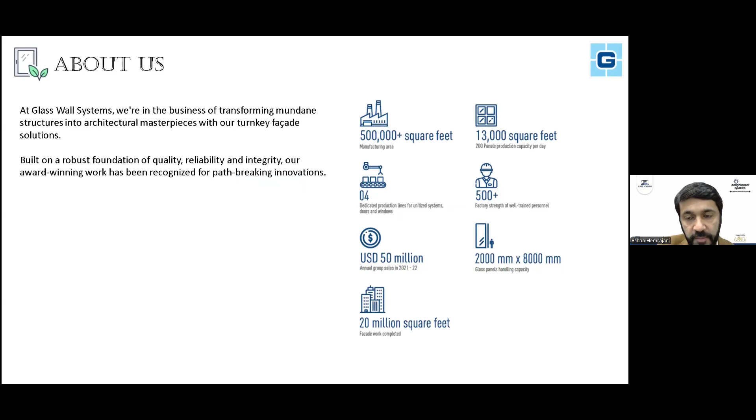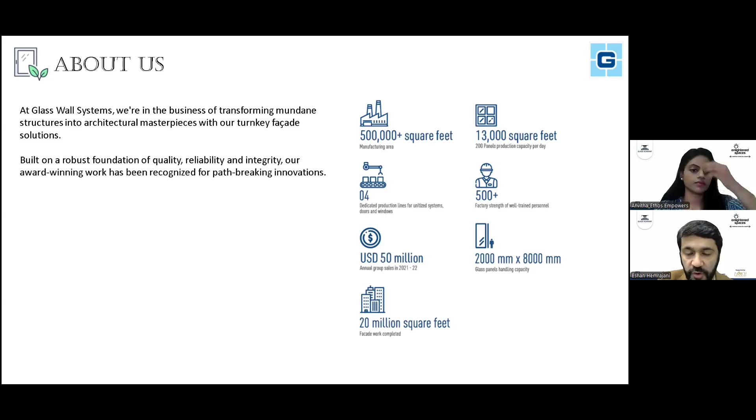So what I'm going to start with is a quick introduction about the company that I'm representing, Glass Wall Systems India Private Limited. We are basically facade fabricators based out of Mumbai, India. What we do in the country is we execute turnkey jobs related to facades on buildings, and we do everything in terms of design and build. So we have our own engineering team, we do our own manufacturing, and we do our own installation on site as well. We do an end-to-end service for our clients across India and now even in the US and Australia.

The flagship company where we are carrying out facade works is Glass Wall Systems, and I look at the operations in this company. We are present globally, but our head office is based in Mumbai, India.

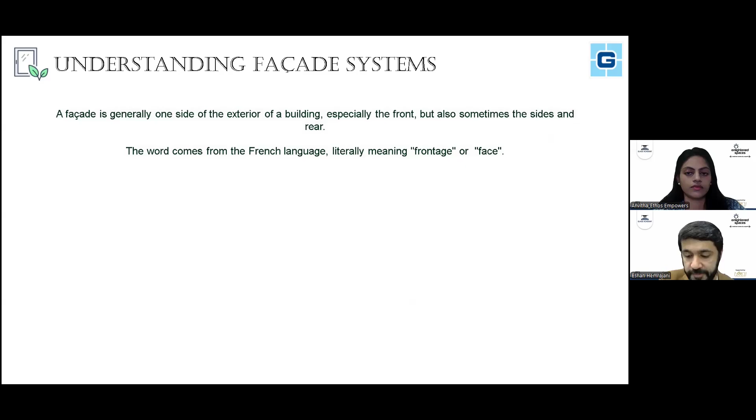Jumping right into it, facade is basically meant to be anything on the exterior of the building, and it is derived from the French language, meaning frontage or face. Facade as a concept has evolved tremendously over the past many years, and it is basically, in my understanding, a function, a balance between function and aesthetic, and people are striving to get the right balance between both. They sometimes work in tandem, they sometimes do not.

So what we aspire as engineers or builders, we cater to both sides of the subject, where we cater to the aesthetic determined by the architects and also the function determined or required by the clients or the consultants on the job. What you have as a result is very pretty looking buildings, and this is what we aim to do.

There are some key factors when you design a facade system on a building. The first and most important thing is that you have to choose the right materials and finishes, because being on the exterior of the building, it is under a lot of pressure in terms of air, water, seismic movements, and stuff like that. So the facade system and the materials that go into making it have to be able to withstand all the forces of nature. This is one of the most important things, finding a balance between the aesthetic and the function of the material you're choosing.

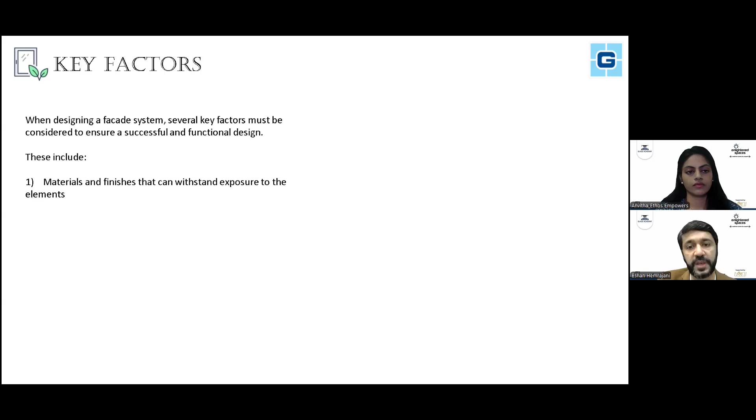Any sort of facade system on the exterior has to have strong principles in terms of drainage and water management, because the function of the facade is to not allow any natural element in terms of water to enter the building and cause problems like mold, leakage, or other issues. So any system has to have adequate drainage designed into it.

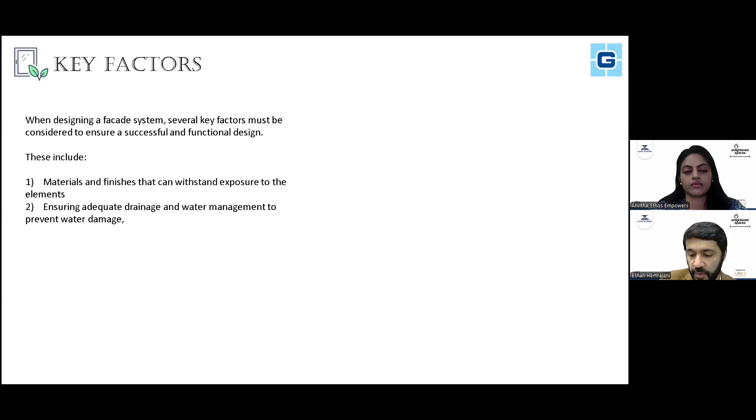It has to be properly insulated. Thermal performance is of high importance, because you want your facade to have maximum vision, typically on a glass building, but you want minimum heat loss from the building. So what you need to cater to in terms of the design and the elements you use is to obtain a high thermal performance on the building.

What we have right now, and which is gaining trend with the vision of the world and vision of India also, is to use sustainable and eco-friendly elements. We all have, I believe, a larger aim in our lives to take as little as we can from the environment, and we need to start exploring as an industry more sustainable and eco-friendly elements to use on the facade.

Wind loads and structural integrity obviously are of utmost importance. It's structural safety in terms of the facade and its integrity, because the building is expected to stand for a minimum of 25 to 30 years without maintenance, even longer. Sometimes you design structures for 100 years. So the math that goes into it is a function between having the right cost on the job as well as having the right integrity of the system in terms of structural performance. That is something that needs to be taken into consideration when designing any sort of facade.

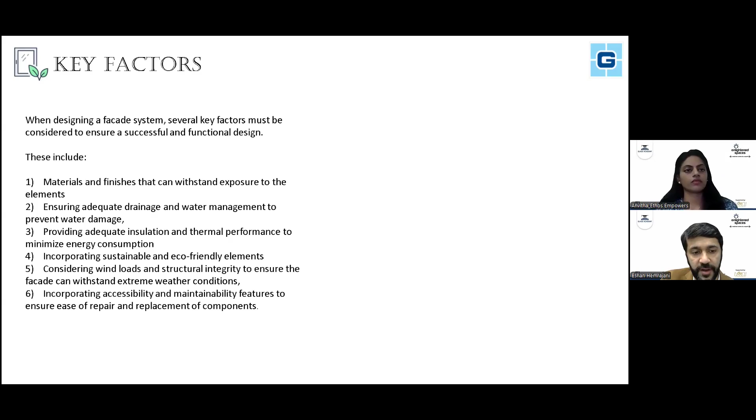Typically, facades are marketed to be maintenance-free or have minimum maintenance. However, you need to be sure as to how you're going to maintain the facade from the exterior of the building. So you need to incorporate accessibility and maintenance features while designing the facade itself.

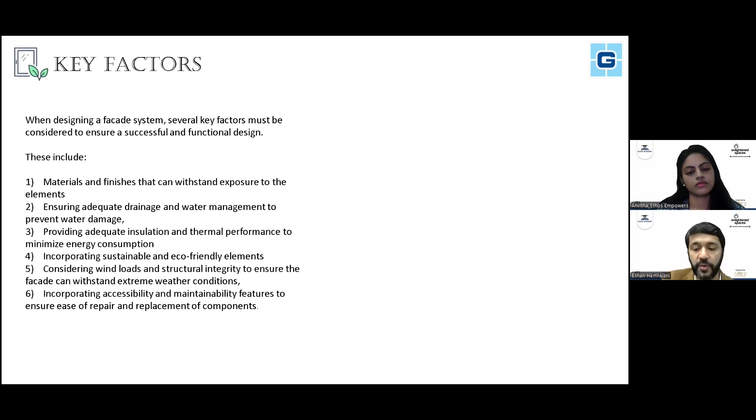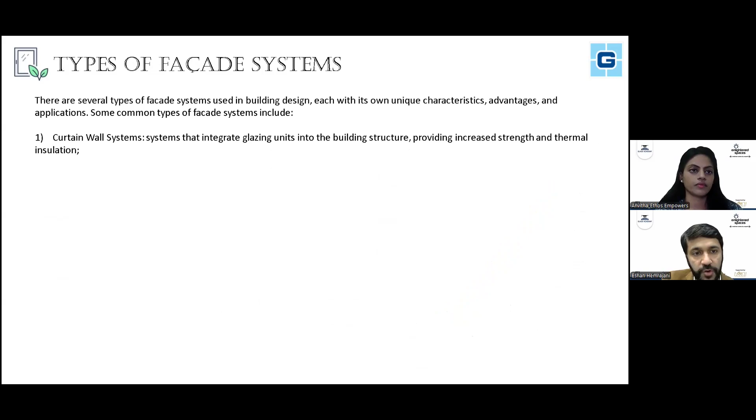There are several types of facade systems, and each of them have their own advantages, disadvantages, strengths, and weaknesses. Typically, what I want to talk about today is curtain wall systems, which are basically aluminum and glass, and different systems within curtain wall systems using glass as an infill.

We have rain screen facades as another type of facade system. It's nothing but a rain screen, as the name suggests. You have an exterior cladding which is attached to the building structure, but it allows for ventilation and drainage as a pressure equalized system, acting more as an aesthetic element. Whereas curtain wall systems have to be not only an aesthetic element in terms of cladding material, but also have a huge amount of performance spec that they have to adhere to.

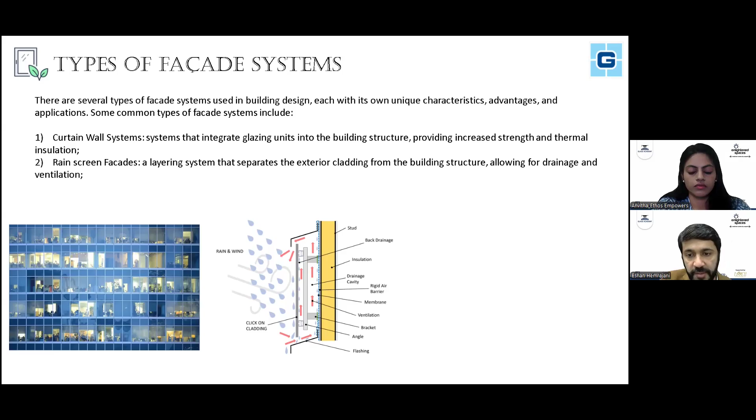We also have sandwich panels. These are pre-insulated panel systems. These can also be used in lieu of curtain wall systems wherever glass is not desired on an exterior element, and insulation as a criteria is high in the requirement of the application. We have some sandwich panel systems that are now also gaining much popularity.

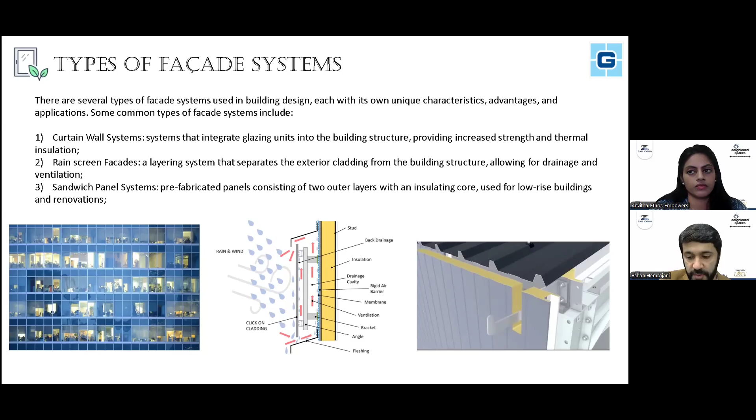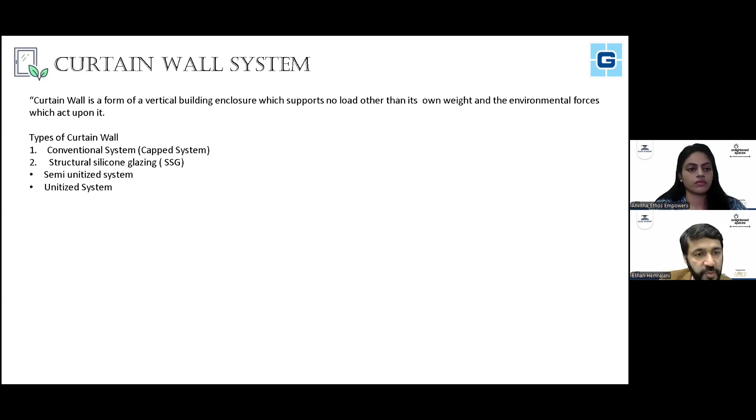We're going to speak a bit more about the curtain wall system. There are typically two types of curtain wall system. One is the conventional system, a cap system, where there is no structural glazing in terms of the silicon used to bond the glass onto the frame. The other one is with structural silicon, and it has two sub criterias: the semi-unitized system and the unitized system. We'll touch upon all these systems today briefly.

First we'll talk about the conventional system, what we call a stick curtain wall system. The aluminum profiles or components are installed directly on site, and the glass is held mechanically with a cover cap and a pressure plate. These systems were done initially a while back, typically on site, so you did not have the need for a factory. This was all fabricated on site, which is how it used to be done earlier.

But there are some disadvantages because everything is carried on site. There is a longer installation time attributed to stick curtain wall. There's certain less importance given to quality because everything is executed at the site itself as opposed to a controlled environment in a fabrication shop, so there's definitely potential for more errors in terms of fabrication and finished quality of the product.

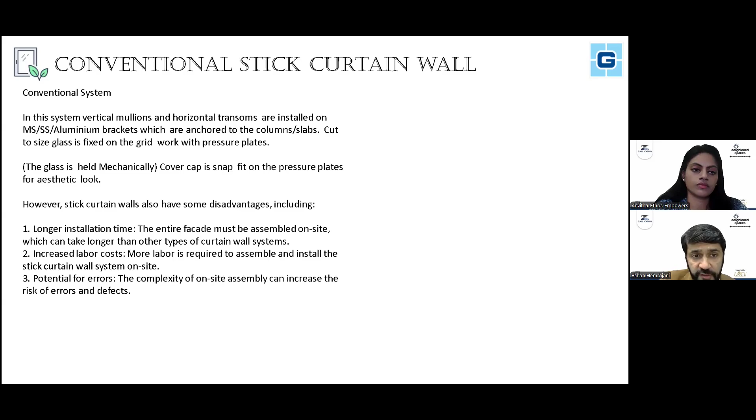Also, it is heavy on labor because everything is executed on site, so there is increased labor cost and increased safety concerns to execute this kind of system on site. So this is how it's typically done, where you have the aluminum components and then the glass, which is a mechanical fix with a pressure plate and a cover cap.

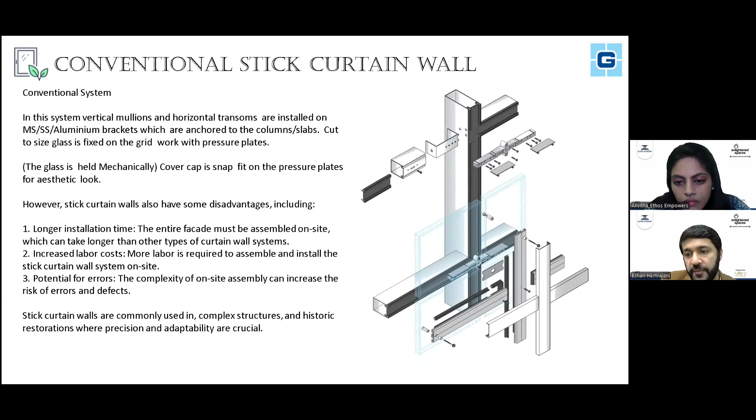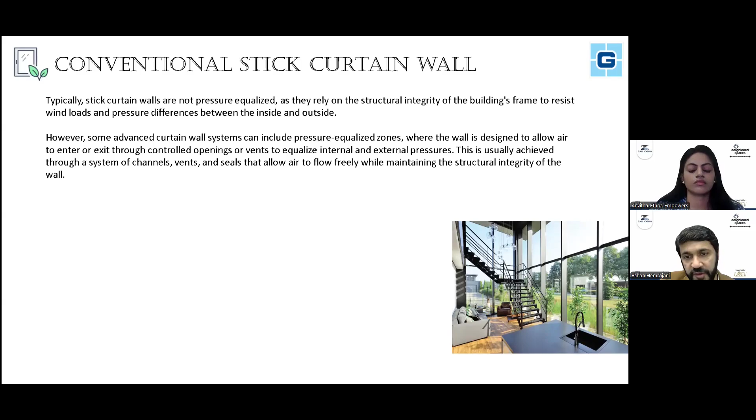The grid work goes onto the site, and then the glass is manually placed into position with the help of hoists and fixed up mechanically. Typically, stick curtain wall is not pressure equalized, which is one of the most important functions of an exterior facade. But nowadays there are certain stick curtain wall systems which are also pressure equalized. These are some snapshots where you can see the grid work already installed on site and the glass being hoisted into place via crane and fit out manually.

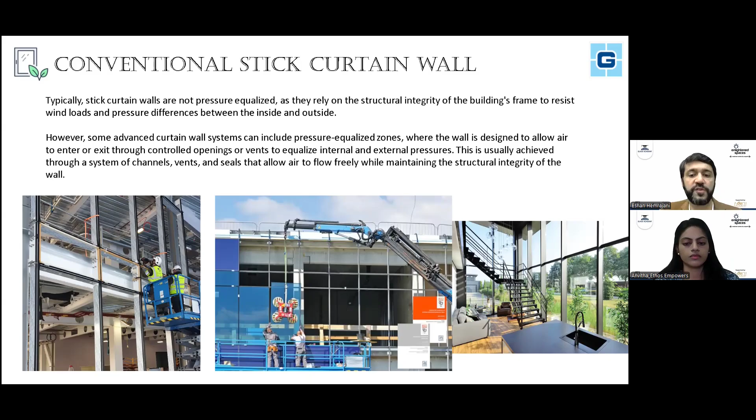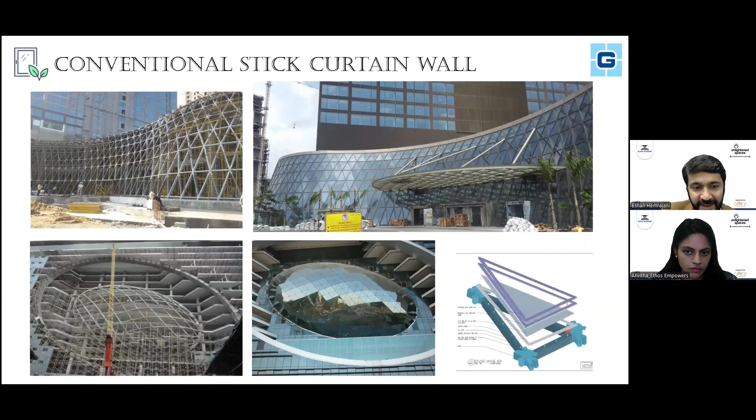For larger buildings, in terms of height, the skyscrapers you see nowadays, this system becomes tedious because you cannot access a certain level to do this. So there's a definite height restriction to execute these systems, and they are more or less now used for renovations or smaller heighted buildings, or wherever there's some complexity involved in the structure requiring site survey and a structure to be built on site. That's typically when we go for such systems now. These are some more examples of a stick curtain wall being executed on site with a pressure plate and cover cap, all glass wall projects.

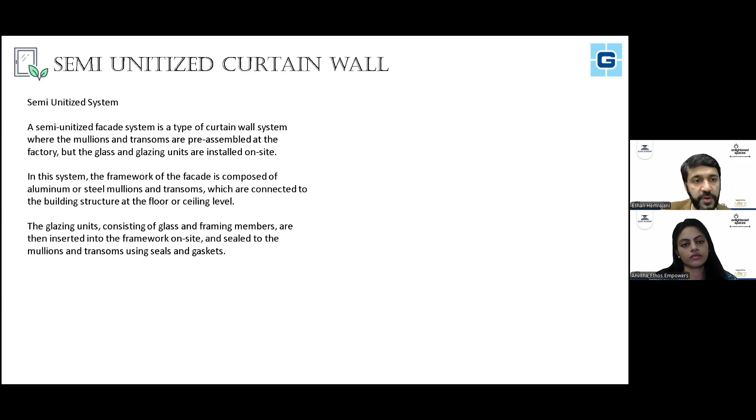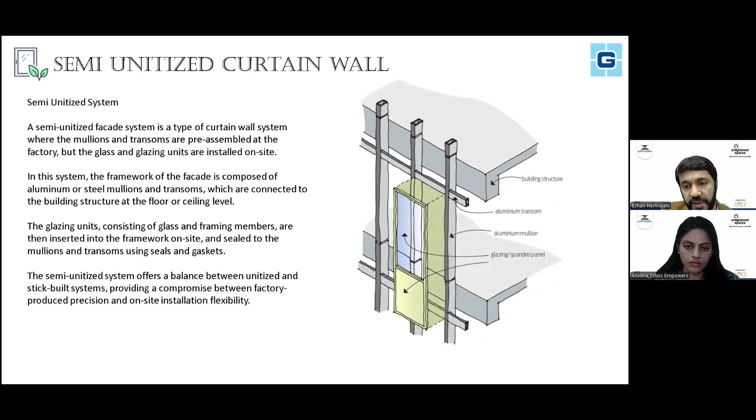Then what you had as a natural evolvement on the systems was a semi-unitized system. This is basically a cross between the conventional stick curtain wall and a unitized system. What you have is the grid work coming onto the site as aluminum grid work, similar to what happens in the stick curtain wall, but the glass with a sash frame with an aluminum subframe around it is glazed in factory and then fixed on site. So it is not completely site executed work, but a midway point between a unitized and a stick curtain wall system. As you can see here, the building structure with the aluminum framework, and then the sash with the glass glazed in the factory, comes in and fits into the cavity or the grid work.

What you have now, typically used around the world, is a unitized system. This is where everything is done in the factory, as in the whole panel as a unit, along with the aluminum members and the glass structurally glazed into the unit, comes as a finished product from factory and is ready to install on site. This is now considered to be the norm in the industry as a standard system used across projects.

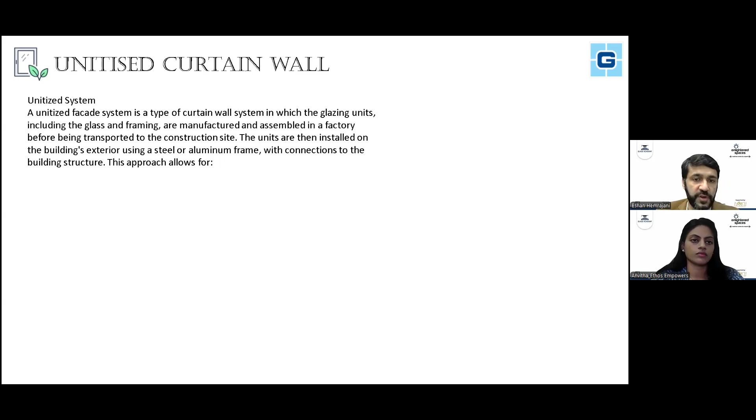With unitized systems, because everything is first made through the factory, there is minimum value add on the site itself. That improves control on material quality and incoming material times, and the accuracy of the product is very high because everything is done in a controlled environment. It also hugely reduces the requirement of labor on site, because now you don't need access equipment to start with, in terms of scaffolding or anything else, to install.

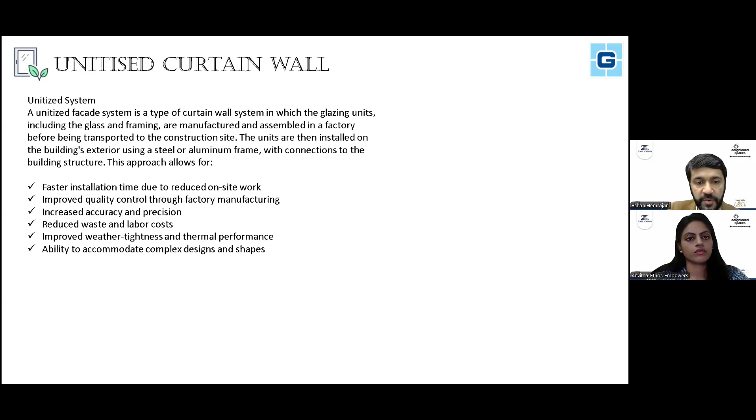What you just need is a simple hoist and a crew of 7-8 people to install maybe 50-60 panels on site. So what you have is faster installation time on site, reduced waste and labor cost. What you also have is, because you can test the entire product for water tightness and thermal performance, you get better performance with this system.

So there you can see now there is no particular aluminum grid work installed on site. The whole panel as a unit is coming in along with the spandrel and the vision glass, fitting into each other like a jigsaw puzzle. So you have a male and a female joint between each panel, which acts as the air and water barrier.

Sequencing is important because you have to follow a certain sequencing in terms of installation. But definitely, this is one of the most evolved systems as of now available in the industry.

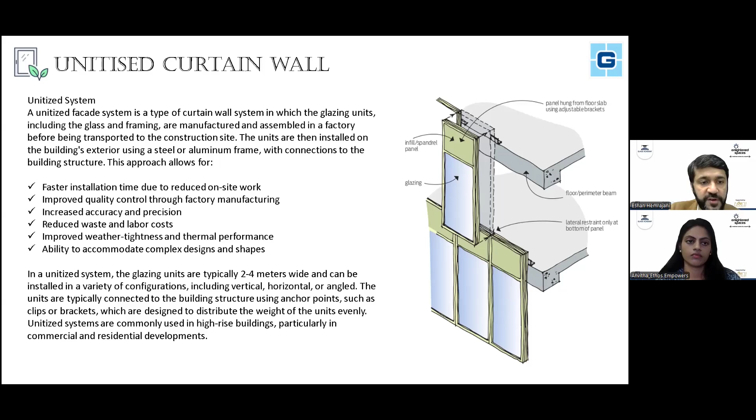So this is basically a section view of typically how a unitized panel looks, where you have the vision panel, which actually provides the vision as the name calls for it. Then you have the spandrel section, which is typically in between floors. The spandrel section definitely has its own performance criteria to maintain.

Basically, there are three things in the spandrel panel. One is to ensure that the whole assembly from the floor and the spandrel panel together acts as a smoke barrier between the two floors. That is one of the most important functions of the spandrel area.

Insulation at the spandrel area prevents heat loss. So thermal criteria is the second thing for the spandrel area to cater to.

And the third is, obviously, because you have a solid kind of shadow box or spandrel behind the vision glass, it provides an aesthetic fulfillment of performance as well, so that anyone standing on the exterior of the building is not able to see the slab at the back. So all your services, let's say the slab area, the false ceiling, and all your services can run behind the spandrel area. So to have a well-designed spandrel as well as a vision is the basis of a unitized system.

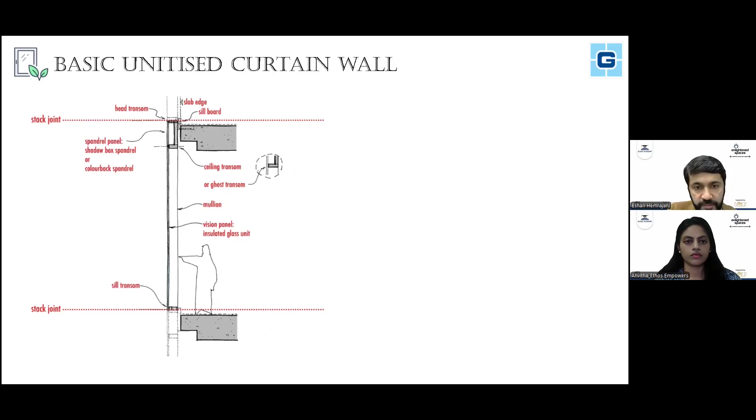One of the most important things, as we mentioned earlier, is any system has to have certain performance criteria in terms of the structural, the water penetration, the air penetration, and the thermal performance. So this is a typical sketch of what a unitized system looks like, where you have the rain screen gasket at the front, then you have the water and air barrier right at the back, and then you have the splice joint between the two panels.

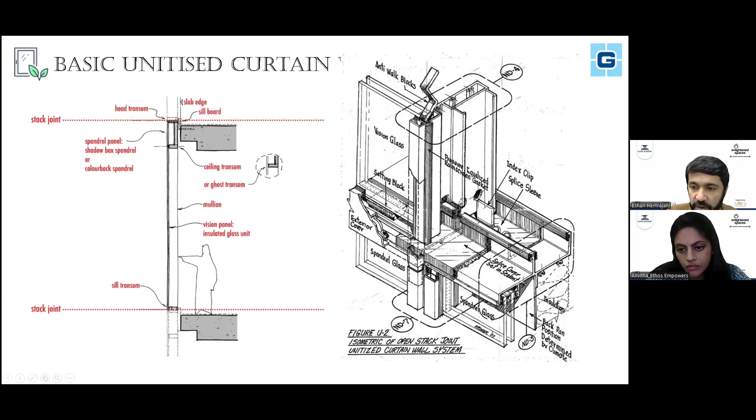So you can also see a setting block, which is required to take the dead load of the glass. And then you have the spandrel glass at the bottom. You also see the insulation of the back pan, which is a part of the spandrel panel. Typically, the insulation material that we use is rock wool, or rock wool is the company name - the technical name is mineral wool.

What you have in the front is the main rain screen gasket, and then you have multiple what we call water barriers in terms of gasket engagements behind the main rain screen gasket. You have the wet chamber, as we call it, as well as the dry chamber at the back.

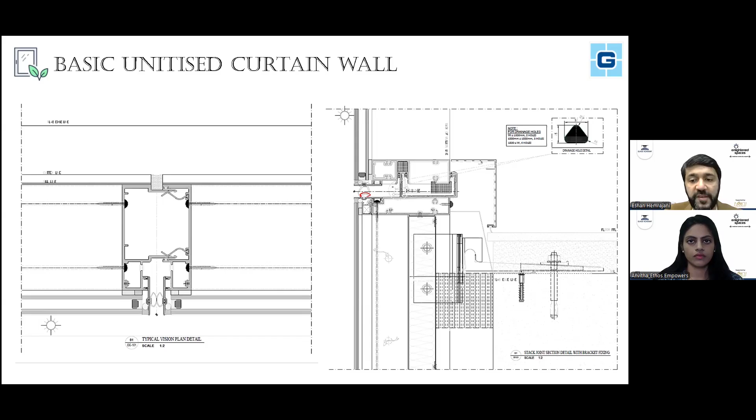Here you see some more examples of different shapes that can be achieved with aluminum used as a profile, which is extremely malleable, and with the right alloy gives you the right balance of strength, as well as a huge opportunity to make different shapes.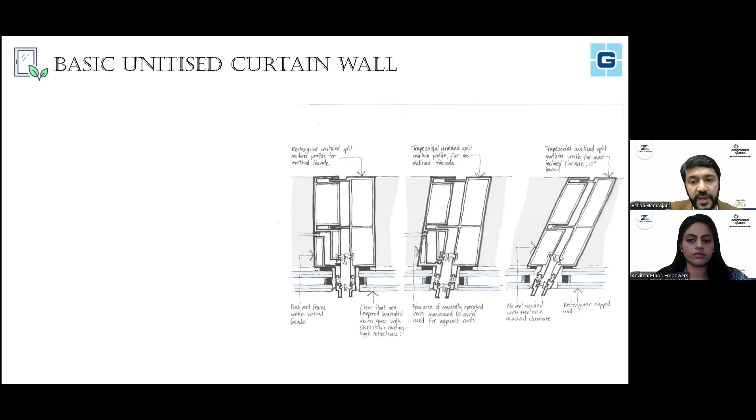The typical alloys we use are 6063, 6061 with various tempers, T4, T6, T5 tempers of aluminum. As I told you, it is a non-corrosive material, or has good non-corrosive properties. It has good thermal properties as well, and it is extremely malleable and lightweight, giving you the right structural properties. As a composite, this material is widely used in our industry as a framing material along with the glass.

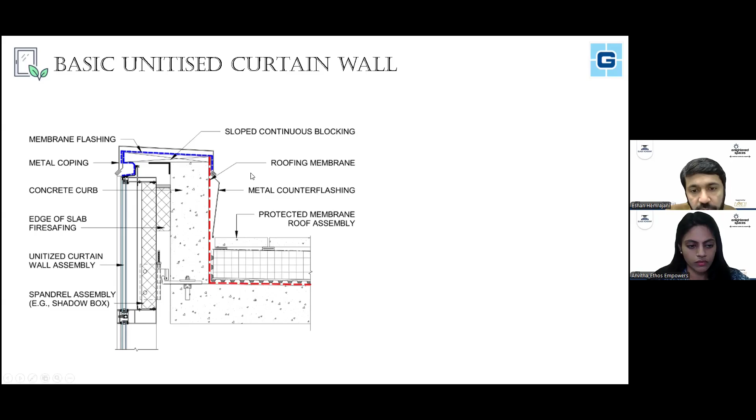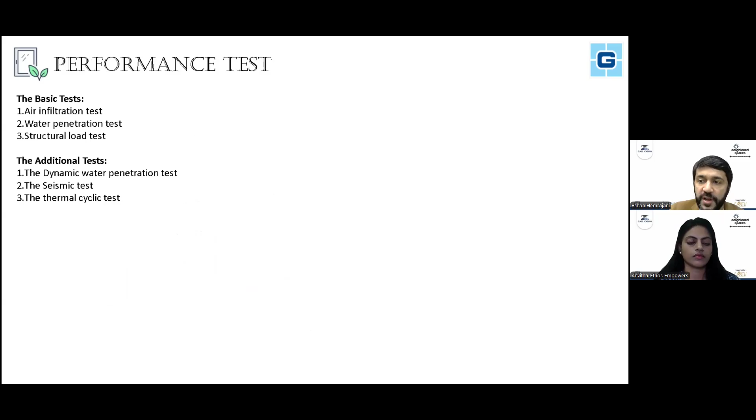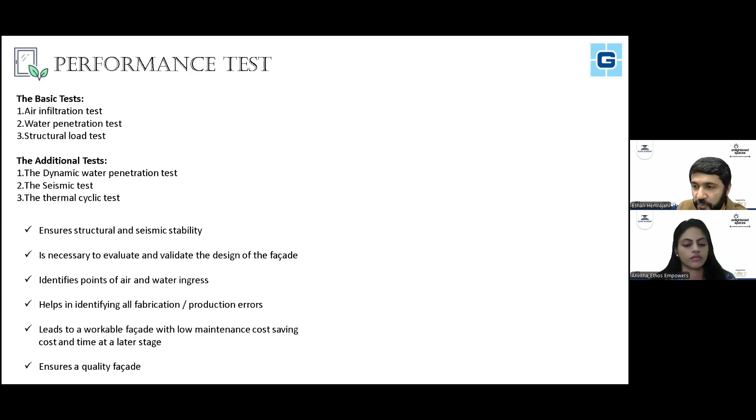As I mentioned earlier, every system has to have a performance, and these are designed to perform to a certain air infiltration, a certain water penetration, as well as a certain structural criteria or structural load test. So what you basically want is the system to not have water inside it. You need to have a higher level of vision. A good thermal performance is also required, and then structural stability.

What you typically have is third-party test labs where you build out the whole or a part of the project, and then you test it to the project criteria in terms of wind, air, and water. What you get to learn from that is whether the system will perform under worse conditions on site, and you have minimum failures on site, because that is not something you want to deal with on the project level.

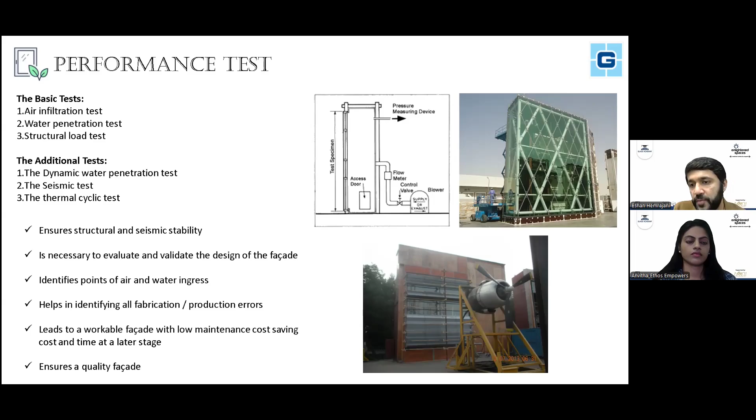So I want to discuss a bit about what sort of criteria goes into designing a facade system. One of the most important things is thermal properties, and it depends on where you're designing the system for. Let's say in India, the delta T, or the temperature difference between the ambient temperature within the building and the temperature outside, there's not too much of a difference.

Typically you're looking at 25 or 26 degrees Celsius within the building, and at max in a city like Mumbai, you're looking at 40 degrees on the outside. So you're talking a delta T of 15 degrees. What you typically want is minimum energy loss in terms of air conditioning from within the building to outside.

How do you achieve this kind of thing is what is important. If you go to a European country, or the United States of America, where the temperature on the inside would still probably be at 25 degrees Celsius, but the outside temperature is at minus 10 or at zero, here you're dealing with 35 to 40 degrees of delta T.

So what this essentially means is your system has to cater to this kind of temperature difference, or it could lead to a high level of energy loss. When you design for such colder environments, what you want is minimum cold to come in, and the heating cost to be maintained inside the building. So typically we are dealing with two components: the glass and the frame.

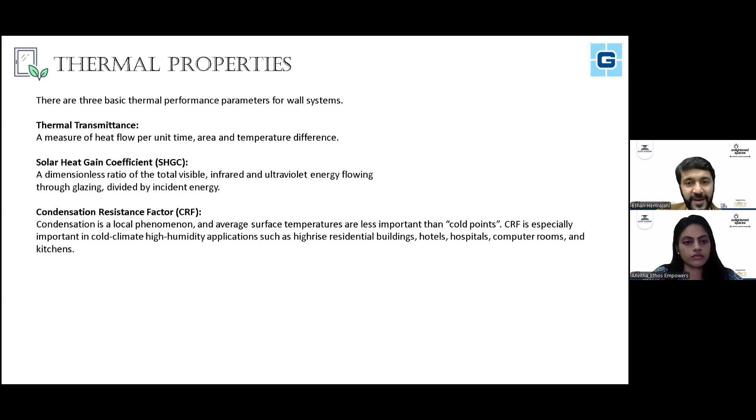All of these are essentially criteria on the glass in terms of their performance. You want maximum light to come in, but minimum heat to come in. So you could have a highly reflective glass, reflecting all of the light outside, but what that would give you is a mirror from an outside perspective looking into the building. And you don't want a mirror, right? You want something which looks fairly neutral.

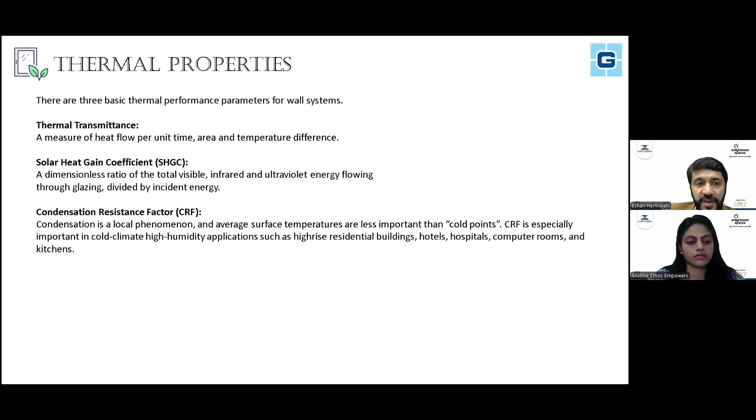So how do you achieve, without having a high reflectance, a neutral look to the building, as well as ensuring performance? There are performance coatings available on glass today, with a single silver, double silver, as well as triple silver performance criteria on the glass, which give you these performance points to achieve higher clarity, higher visual light transmittance, as well as lower solar gain on the glass.

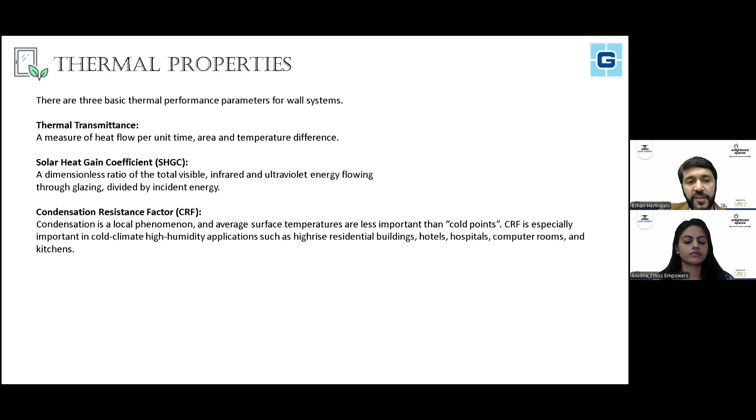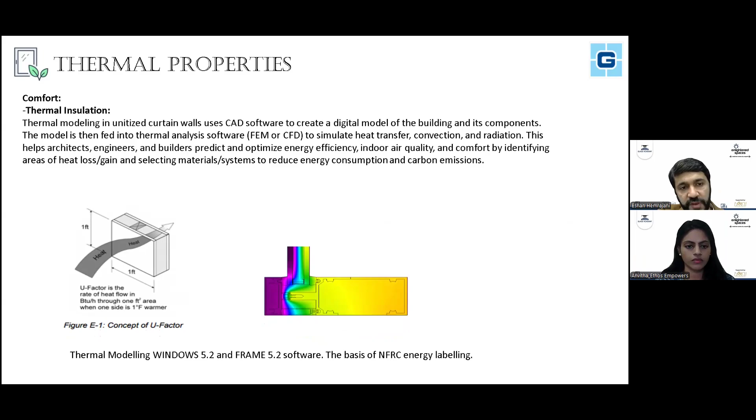So along with the frame and the right glass with the air gap, which again improves performance, you have to balance both to get the right thermal performance on the system. There are different ways to do it, different software available to see where the maximum heat loss from the system is going to be. This analysis is done at the beginning of the project to see that the spec of the materials being used meets this performance criteria.

In a city like Mumbai, you have huge traffic and noise pollution outside, and it's similar for all places in India. But when you are in your office building or residence, you want minimal acoustic loss, or you don't want noise to come into the building. So the system has to be designed for acoustic comfort as well.

There are two major materials that need to take care of that. The IGU, or glass unit, along with the air gap, acts as a barrier for sound transmission. And then your system itself, with proper sealing in terms of the gaskets or joints that are designed, reduces the amount of sound coming into the building. So this has to be definitely designed. The system has to account for that kind of criteria.

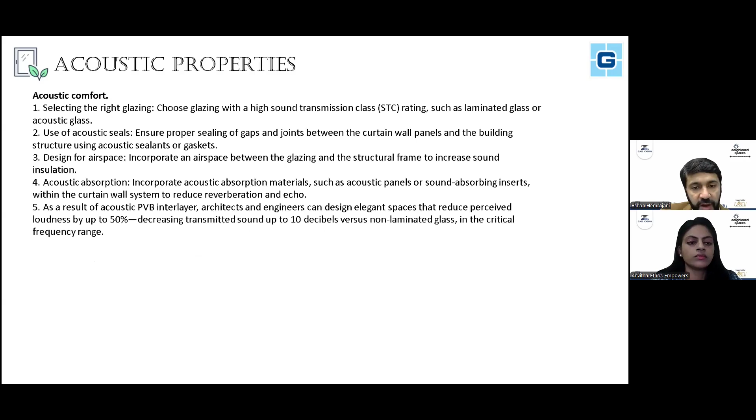We discussed earlier about insulating materials as well. What that insulating material does is not only improve thermal performance, but also improve the acoustic performance of the whole system. There are acoustic interlayers available even in the glass today, which not only add to the structural strength of the glass as an interlayer, but also add to the acoustic performance of the glass. So if you get the glass correct and the frame correct, you can achieve both criteria.

There are different interlayers available in the market. The basic interlayer is what we call a PVB interlayer, polyvinyl butyral, which has certain structural performance as well as acoustic performance. Then it goes all the way up to something called SentryGlas, a high performance interlayer with higher structural strength, typically used on glazing applications, railing applications, skylight applications, which are open to human abuse or other abuse. It has higher acoustic performance as well as higher safety performance. So there are various interlayers available in the market that can be chosen to cater to the right project spec.

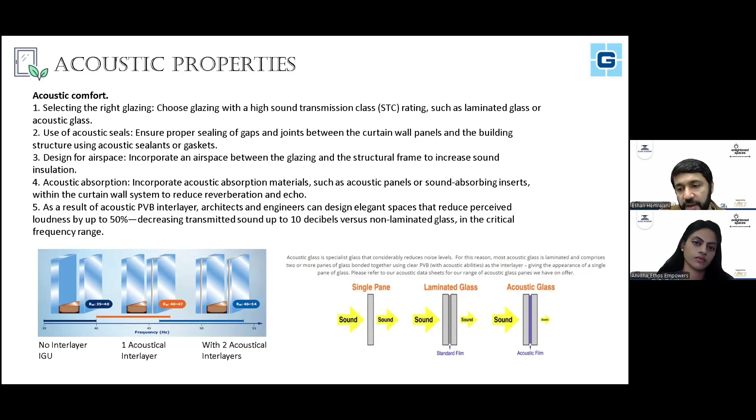Pressure equalization is most important, basically because we are designing the two panels as individual components, and they are not mechanically fixed to each other. This allows the system as a composite to have movement in terms of seismic activity, not inward and outward from the building line, but definitely on a horizontal and vertical position. The system has to be able to breathe and cater to these sort of movements.

So when you have a pressure equalized system, what that means is you don't have condensation within the system, or even if there is some condensation, it has to allow for that water to go out. The most important element in allowing this movement without structural damage, in allowing pressure equalization and a good air seal, are the gaskets designed within the system to allow this compression as well as movement to achieve proper pressure equalization and structural movement on the system.

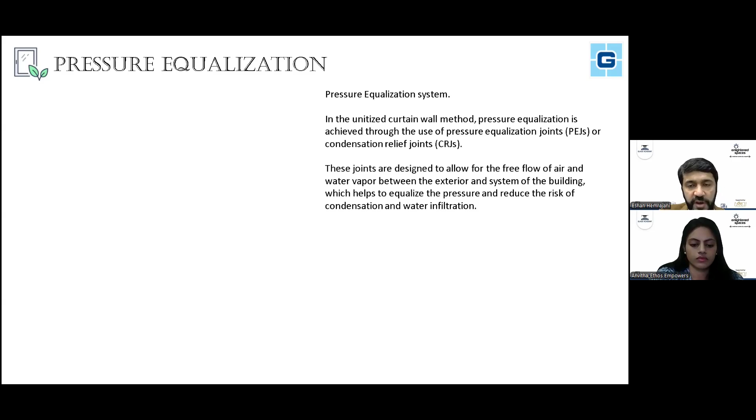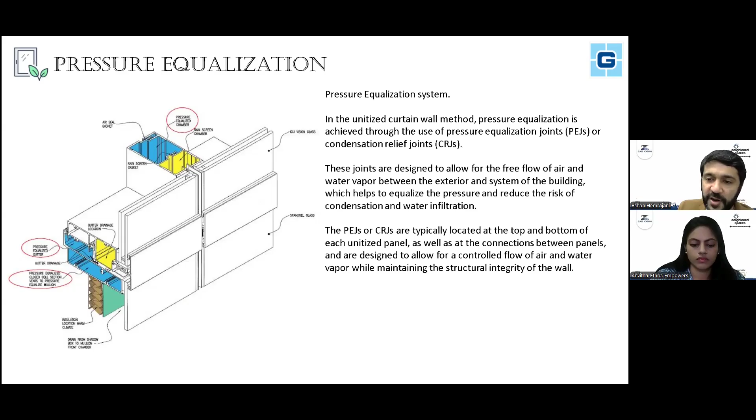Typically, if air is leaking into the system from outside to inside, you will not only have energy loss, but also water eventually coming into the system. So the air seal gasket, which is the last line of defense, is very important to maintain on site, in factory, and in design to ensure the system is performing with minimum air infiltration and the same with water. The air seal at the back also acts as the last line for water drainage. If you cross the air seal, eventually you will have water coming into the building.

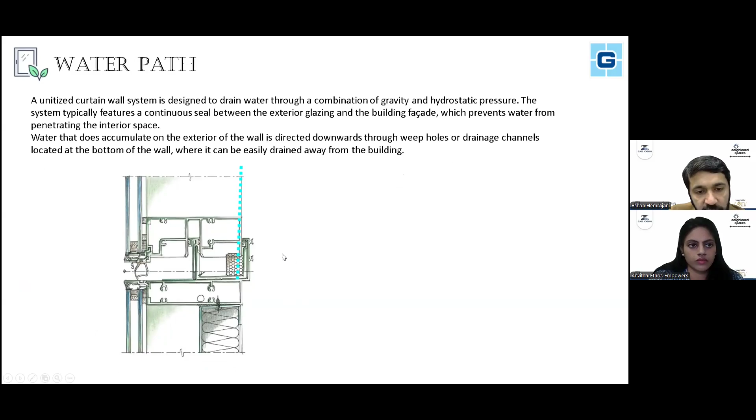So with multiple barriers designed into the system, we try to minimize, or practically make it zero, the chance of air and water ingress into the system.

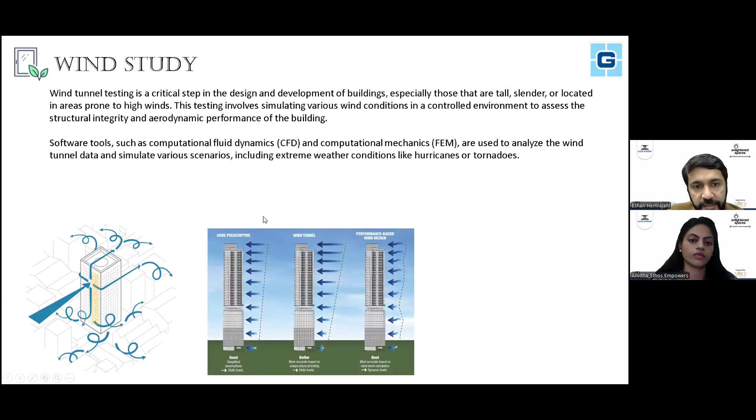We have discussed this earlier. There are softwares available to study the wind acting on the building, and there are ways to do it. There are specific agencies to carry out wind tunnel tests, which map out the entire city, so to say, and then simulate in software the kind of wind loads acting on different parts of the building, which is then put into a project spec and designed for.

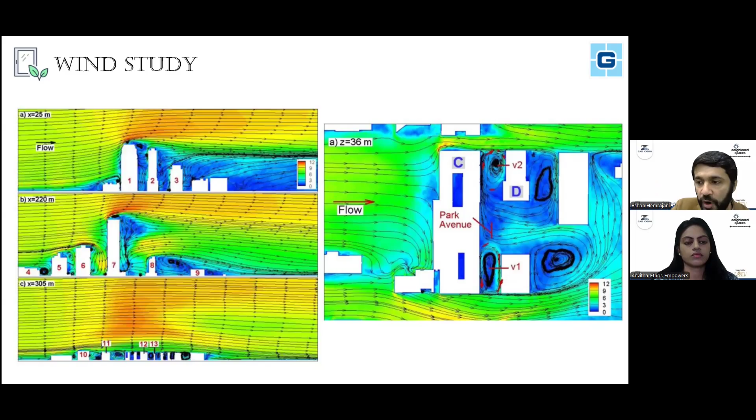So before you get into the design of the system, at the initial stage of the project a wind tunnel test is carried out to determine the high pressure zones on the building. Those localized pressure zones are then enhanced in terms of structural integrity or whatever they are supposed to cater to, and are taken care of at the design stage itself.

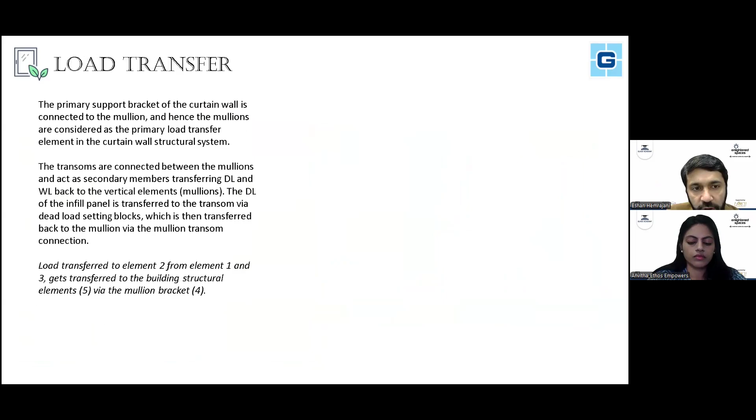The typical way the load is transferred onto the structure is fairly simple because these are all dead loaded onto the verticals and then back onto the bracket onto the slabs. So the slab design has to cater for the loads of the facade that is hanging from it or attached to it.

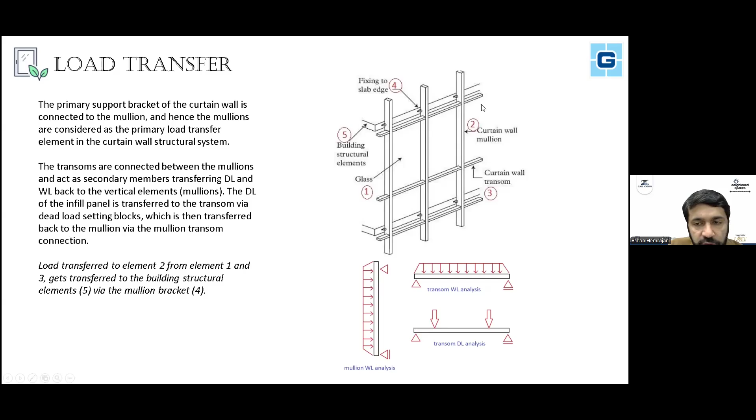So what you have is the primary load, or the wind pressure in terms of an active load, acting on it, which is then transferred onto the structural members in terms of your verticals or mullions, going onto the slab or superstructure. These have to be designed to cater to these kinds of loads.

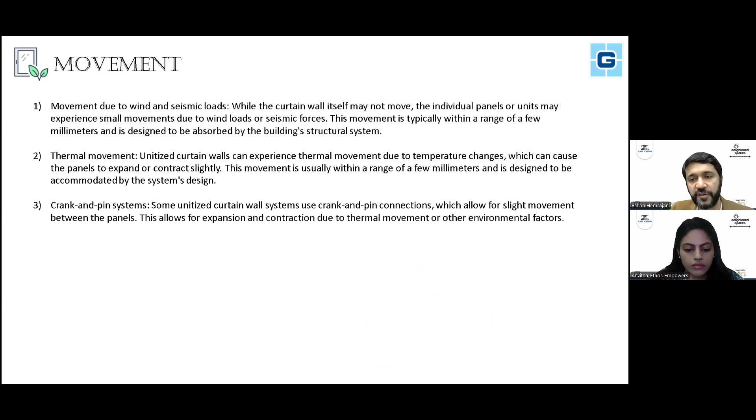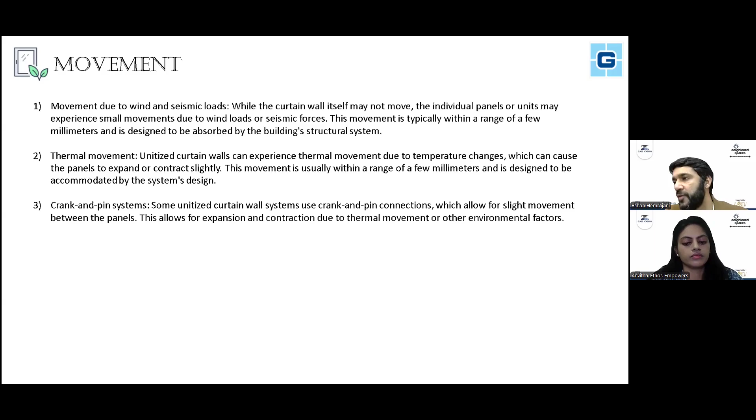As I mentioned earlier, one of the most important things is to cater to movement of the facade. If you have something rigid, typically in terms of stress, it will break. So you don't have a rigid joint, as I mentioned earlier. There is a certain amount of movement allowance in terms of upward and sideways movement designed on all unitized curtain walls.

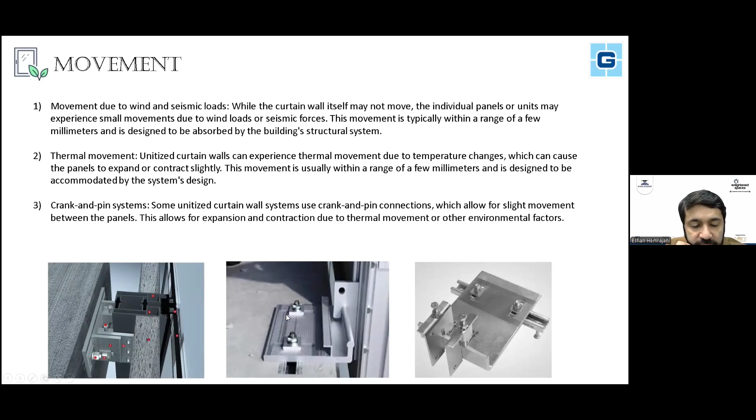This allows, in case of a seismic event or earthquake, the system not to break and fall off. As you can see in these snapshots, there are slots provided on the hook-on bracket as well as the floor bracket to allow this sort of movement. Obviously there are limitations to this, and beyond a certain point, if there is movement, you will get a complete disintegration of the system, a complete failure.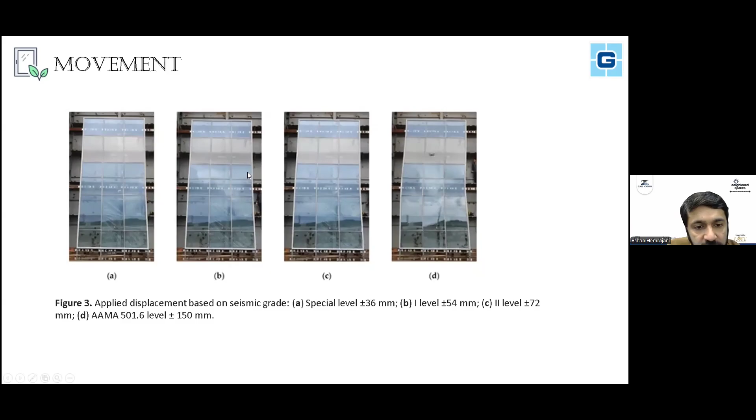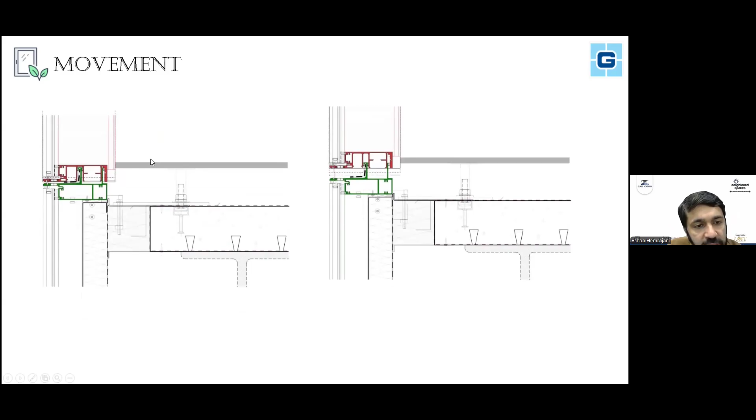There you can see movement testing happening on the performance mockup. Here you can see the stack joint in a closed position and how it can go up to a maximum level in terms of vertical movement. This is important to study before we actually design the systems so that there is no disengagement and total failure of the system.

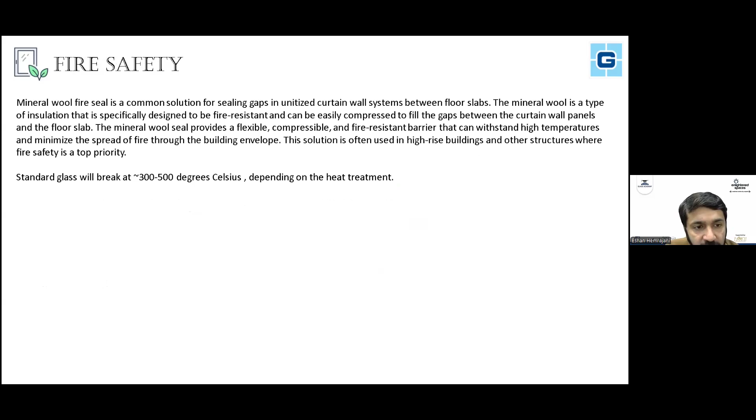Fire safety is one of the most important aspects. We spoke earlier about having a facade which is safe in terms of a fire that happens. Here we are discussing predominantly unitized panels, so let's discuss a bit on how glass behaves.

Glass will break at 500 degrees Celsius, and when you have a fire, you're looking at anywhere between 700 to 900 degrees Celsius. So the glass, in case there is a fire on a slab, will break immediately. What you need to do is first fight the fire with passive firefighting systems within the building itself, in terms of fire retardants or sprinkler systems or whatever other ways are there to fight the fire, and you need to stop the propagation of fire from one floor to the other.

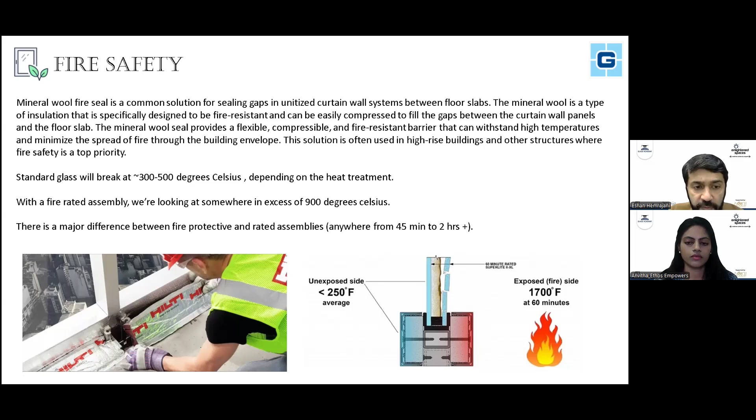So typically the facade system has to cater to avoid propagation from one floor to the other. And that's where the smoke seal, or the spandrel system as a whole assembly, comes into play and is of big importance.

So here you can see clearly that the slab, along with the mineral wool insulation as a smoke seal, and the spandrel panel together form a composite assembly that, even if there is fire on a below floor, will not propagate within the building, because hot air rises, smoke rises, and what kills literally is the smoke.

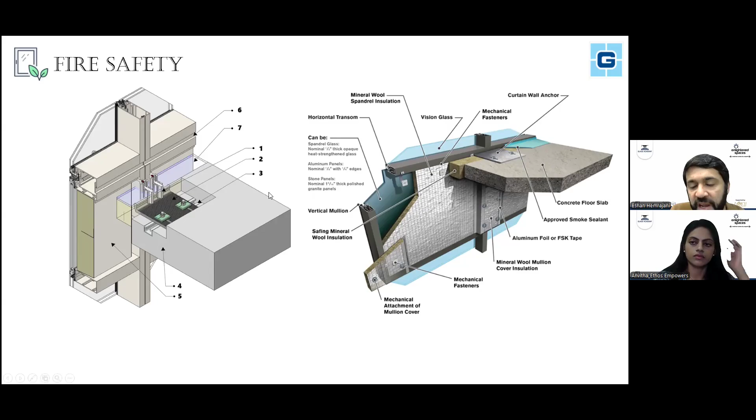So you want to prevent the smoke, you want the fire to not go upwards. This is, as a fire rated assembly, one of the most important things to cater to in terms of a building design. What you see here is what we call the leapfrogging effect, where if there's fire on a below floor, it will definitely break the glass and go to the above floor. But what you need is for the fire propagation to remain up until the spandrel panel and not go on to the vision above, and to have zero propagation from within the floor to the other floor. So these are just some examples of how fire safety has to be taken into consideration while doing this.

We also have operable vents, as we call them. This is basically, in terms of residential buildings, to allow air to come in, because we all love our air to come into our residential building. But in commercial buildings, which are typically air conditioned all the time, the fire department mandates a certain amount of openings to be designed on every building, so that in case there is a fire, the smoke, which is the big killer, the operables allow the smoke to escape by opening.

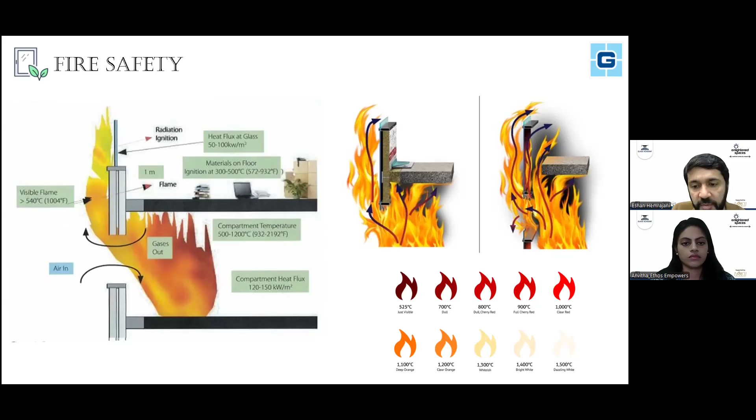A lot of the new buildings now are linking the operables to the building management system, or the fire system, as auto operables. So whenever there is a fire, not only do you have passive firefighting immediately, you also have the vents that open out automatically to allow the smoke to escape and minimize loss of human life.

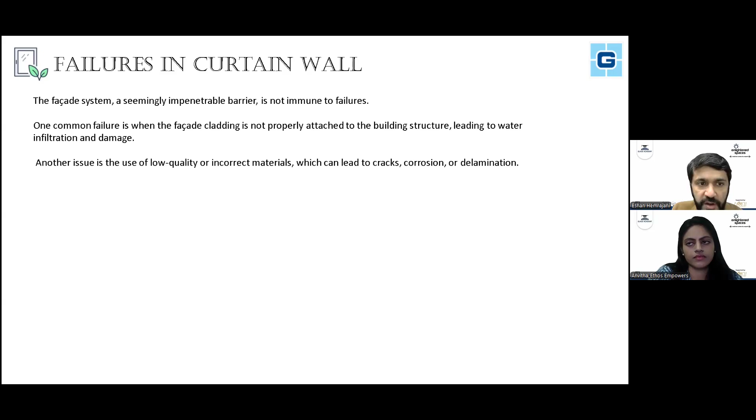We spoke about a lot of things you need to do correctly for a facade system to perform, and if you miss any of those, you would definitely have failures in your system. So choosing the right performance criteria on the project, the right materials, the right system, and the right fabricator or partner to install it is of extreme importance. One needs to weigh the strength of the fabricator, the quality requirements on the job, and the schedule required, and all of that has to be looked at together before starting installation on site.

We have to maintain the system. Typically it's maintenance free, but with the building maintenance unit, misuse of the facade on the building has to be taken care of immediately for it to have a longer life. Obviously, if there is some design flaw in terms of how the wind load calculations are done, then you are in for a problem that cannot be solved easily and will have a perennial problem. So it's very important to have the right partner and the right criteria before you even start a project.

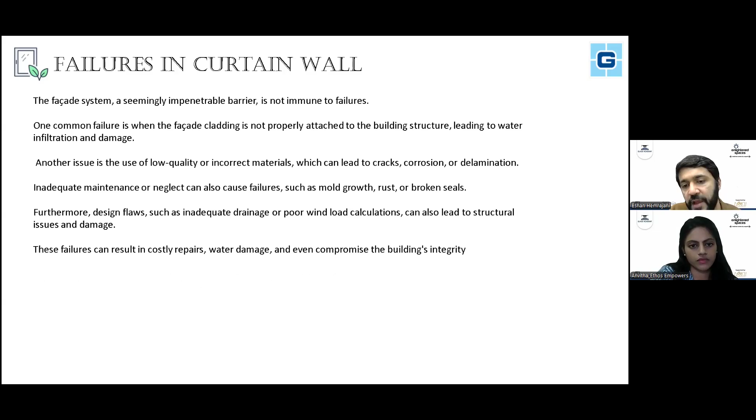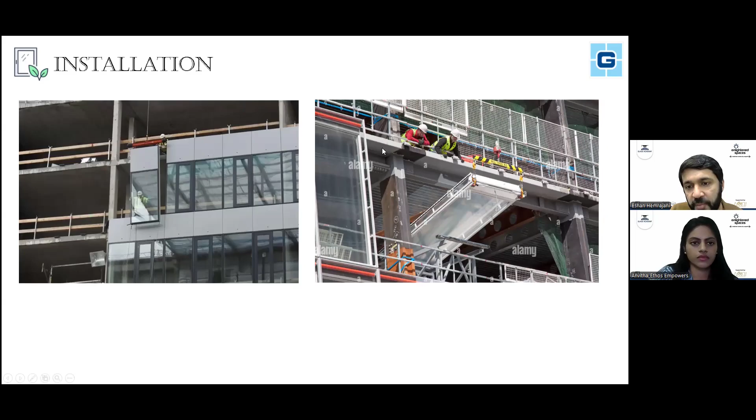Just quickly on the installation, this is how the unitized panels are installed, which we spoke about earlier. They can be hoisted from the top of the building, with a minimal amount of laborers picking it up and putting it into place.

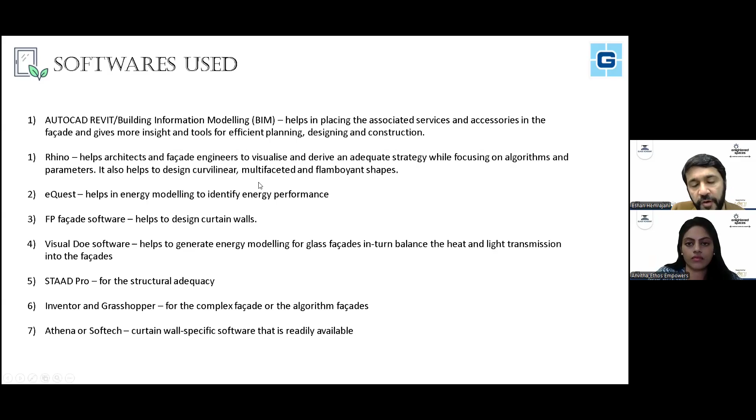I think that's it from my end.